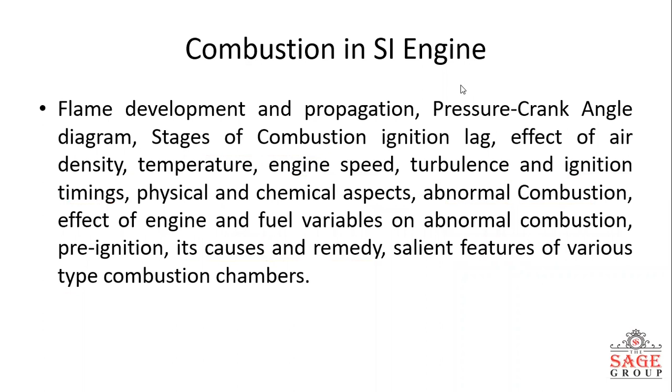So, starting with our first topic, the first topic is combustion process in a SI engine. The combustion may be defined as a chemical reaction in which certain elements of fuel like hydrogen and carbon combine with oxygen, liberating heat energy and causing an increase in temperature of gases.

The conditions which are necessary for the combustion to take place are the presence of a combustible mixture, some means of initiating the mixture like a spark plug or a fuel injector in case of CI engine, stabilization and propagation of flame in the combustion chamber.

The theory of combustion is a very complex subject and has been a topic of research for many years. In spite of this, not much knowledge is available concerning the phenomena of combustion. The process of combustion in case of SI engine takes place in a homogeneous mixture. In SI engine, a nearly homogeneous mixture of air and fuel is formed in carburetor.

Homogeneous mixture is thus formed outside the engine cylinder, and the combustion is initiated inside the cylinder at a particular instant towards the end of compression stroke. The flame front spreads over a combustible mixture with a certain velocity. In a homogeneous gas mixture, the fuel and oxygen molecules are more or less uniformly distributed.

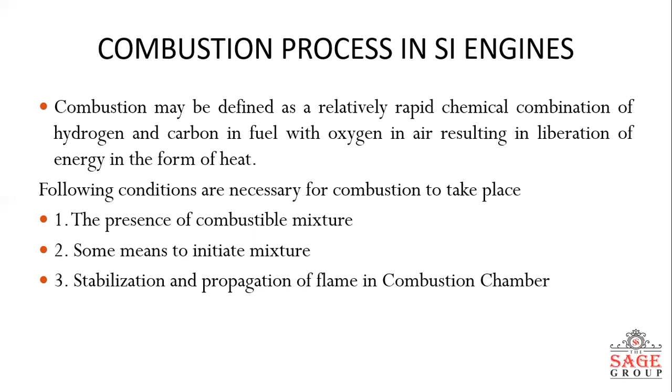Once the fuel vapor air mixture is ignited, the flame front appears and rapidly spreads through the mixture. The flame front is a narrow zone separating the fresh mixture from the combustion products. Under normal operating conditions, we can divide the combustion in SI engine in two general types. One is normal and another one is abnormal combustion.

Under normal operating conditions, the combustion is initiated towards the end of compression stroke at the spark plug by an electric discharge. A turbulent flame develops following the ignition and propagates through the pre-mixed charge of fuel and air, and also the residual gas in the clearance volume until it reaches the combustion chamber walls. In normal combustion, the spark ignites and a smooth burn travels through the combustion chamber. The flame initiated by the spark travels across the chamber in a uniform manner.

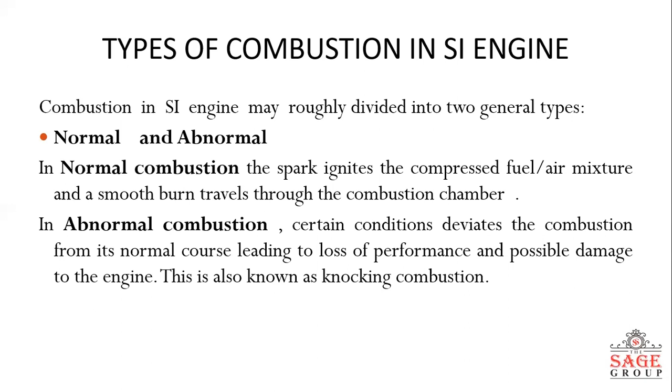But under certain operating conditions, the combustion may deviate from the normal course, leading to the loss of performance and possible damage to the engine. This type of combustion is known as abnormal combustion or knocking combustion. The consequences of this type of combustion are loss of power, recurrent pre-ignition, and mechanical damage to engine.

As we can see here, there is a mechanical damage to our engine piston. Such type of damages occur in case of abnormal or knocking combustion. So to avoid this abnormal combustion, a high auto ignition temperature and a long ignition lag are the desirable qualities for SI engine fuel, which we will be seeing in detail in further lectures.

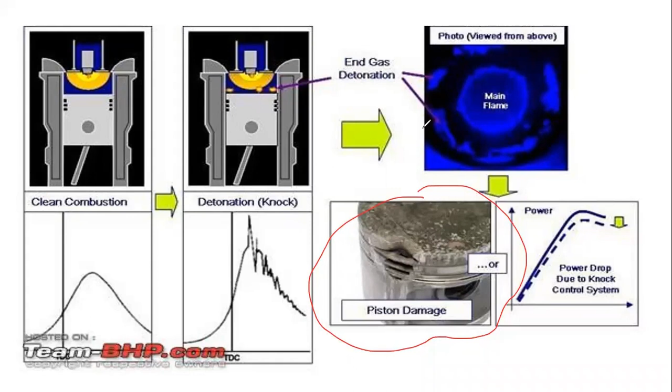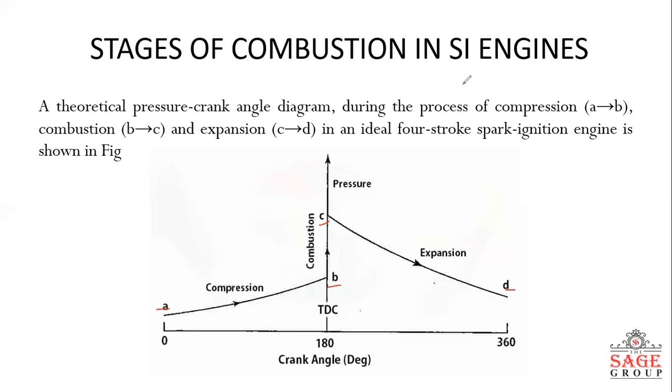The detailed process of an SI engine of an actual cycle can be seen here. In an actual engine, the combustion process in an SI engine consists of 3 stages. The first one being ignition lag, second is propagation of flame, and third is after burning.

The pressure variation during the combustion in a practical engine is shown in this diagram. In this figure, A is the point of passage of spark. B is the point at which the beginning of pressure rise can be detected. C is the point of attainment of peak pressure. Thus, AB represents our first stage, BC is representing our second stage, and CD is our third stage.

The first stage is our ignition lag, or you can call it as a preparation phase, in which the growth and development of a self-propagating nucleus of flame take place. It is basically a chemical process depending upon both temperature and pressure and the nature of fuel, and also the proportion of exhaust residual gases present in our engine cylinder.

The time taken for this stage is usually 0.00015 to 0.0002 second. This is the time which is usually taken by this preparation phase.

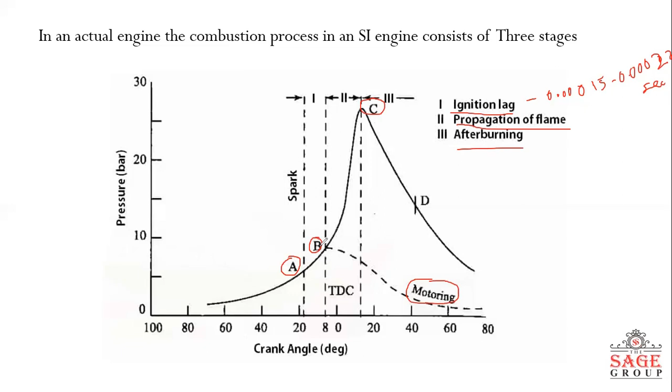During the second stage, the flame propagates practically at a constant velocity. Heat transfer to the IC engine cylinder wall is low because only a small part of mixture comes in contact with the cylinder wall during this period. The rate of pressure rise is directly proportional to the rate of heat release during this stage, since the combustion chamber volume remains practically constant.

The starting point of third stage, that is afterburning stage, is usually taken at the instant at which the maximum pressure is reached on the indicator diagram, that is point C. The flame velocity decreases during this stage. The rate of combustion becomes low due to lower flame velocity and reduced flame front surface.

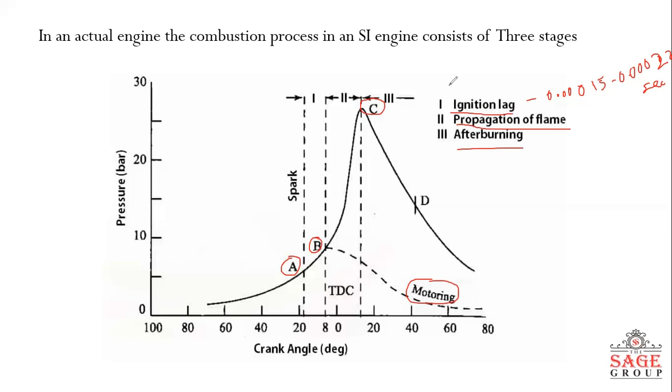Since the expansion has already been started before this stage of combustion, with the piston moving away from the top dead center, there can be no pressure rise during this stage and the pressure goes on decreasing. So these are the three stages of combustion in case of SI engine.

First is our ignition lag, or preparation phase, or you can call it as time interval in the process of chemical reaction, in which the mixture gets heated up to self-ignition temperature. It is very small and lies between 0.00015 to 0.0002 seconds.

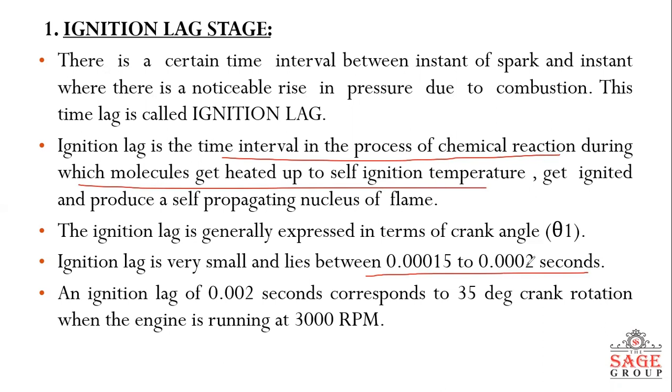Second one is our flame propagation stage. Once the flame is formed, it propagates through the mixture, and rate of heat generation is generally greater in this stage as compared to that of rate of heat loss. Pressure rise is also slow during starting, since the mass of mixture which is burnt is small.

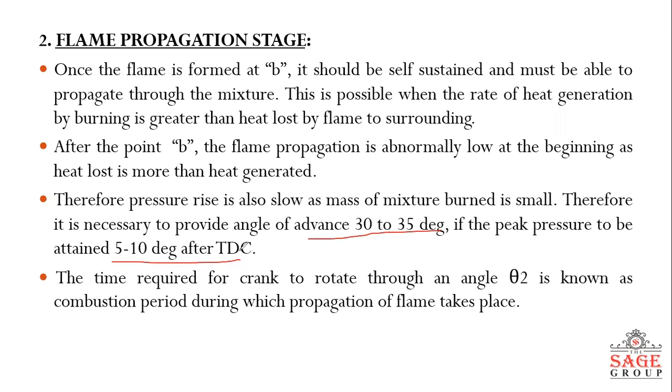Therefore, some ignition advance has to be given of about 30 to 35 degrees so that the peak pressure can be obtained at 5 to 10 degrees after the top dead center.

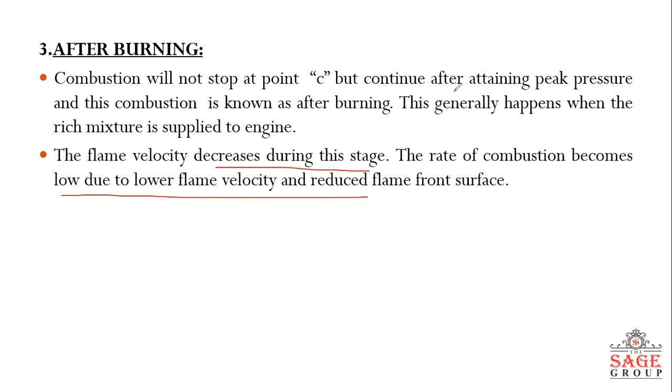After burning: after the attainment of peak pressure, combustion does not stop completely. Some amount of combustion remains there. Flame velocity decreases during this stage and rate of combustion becomes low. And practically, there is no pressure rise during this stage since expansion has already been started. So these were the stages of combustion in case of SI engine.

In the next class, we will be seeing the flame front propagation and the factors which influence the flame speed in case of SI engine.